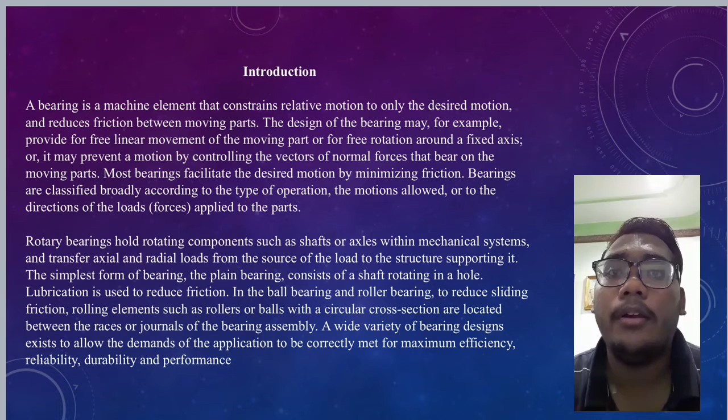Bearing is a machine element that constrains relative motion to only the desired motion and reduces friction between moving parts. The design of the bearing may, for example, provide for free linear movement of the moving part or free rotation around a fixed axis, or it may prevent motion by controlling the vector of normal forces that bear on the moving part.

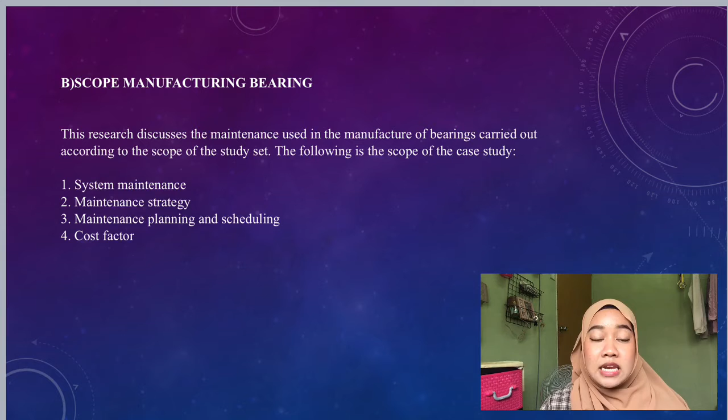Okay, I want to continue the presentation. Scope: manufacturing bearing. This research discusses the maintenance used in the manufacture of bearings, carried out according to the scope of the study set. The following is the scope of the case study. First, system maintenance. Two, maintenance strategy. Three, maintenance planning and scheduling. Four, cost factor. Now I want to present about the importance of choosing the right bearing component and material.

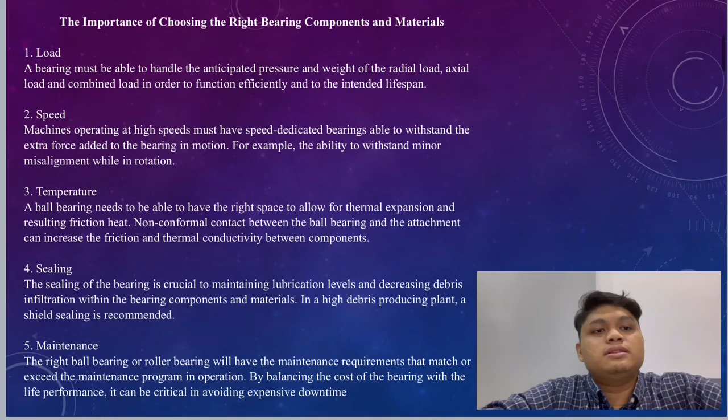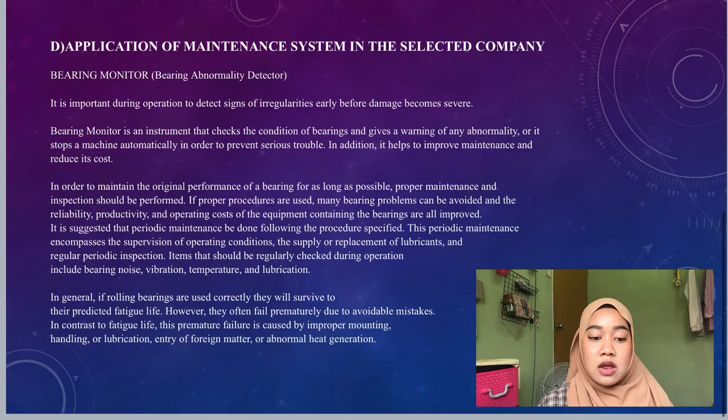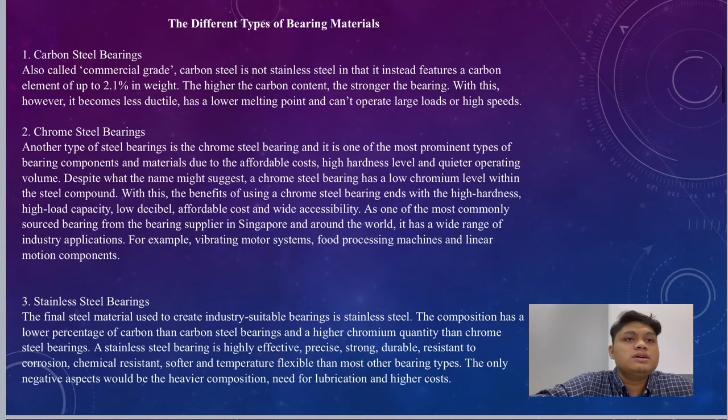Number three is stainless steel bearing. The final steel material used to create industry-suitable bearings is stainless steel. Number four is ceramic bearing. Ceramic bearings are manufactured to produce a highly non-corrosive and durable bearing with two rings of ceramic and a fluorine resin retainer. Number five is polymer plastic bearing, which is a porous material.

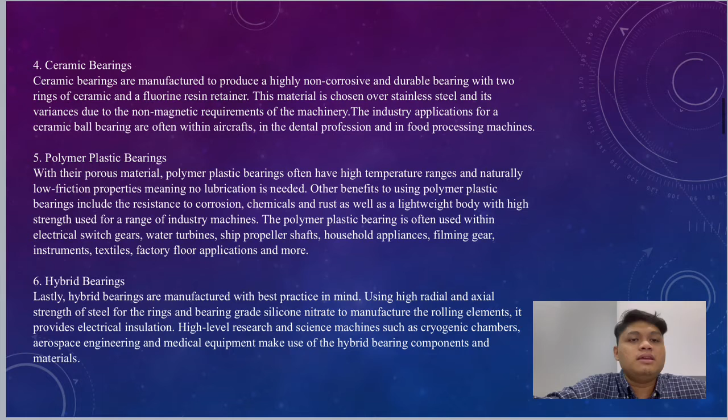Polymer plastic bearings often have a high temperature range and naturally low friction properties, meaning no lubricant is needed. Number six is hybrid bearing. Lastly, hybrid bearing is manufactured with the best practice in mind. Now I want to share about six common types of bearing.

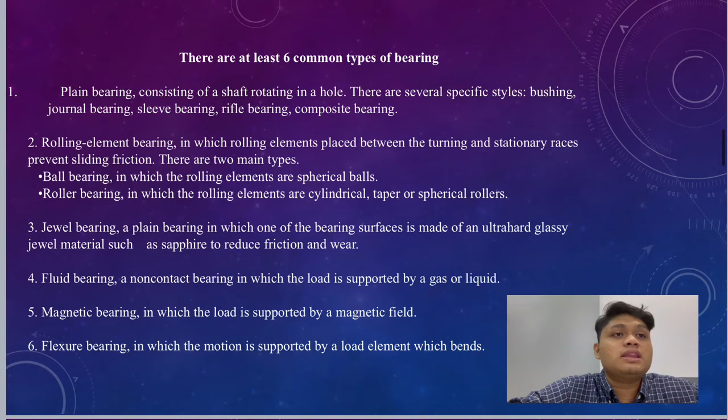Number one is plain bearing, consisting of a shaft rotating in a hole. There are several specific styles: bushing, journal bearing, sleeve bearing, rifle bearing, and composite bearing. Number two is rolling element bearing, in which rolling elements placed between the turning and stationary races prevent sliding friction. There are two main types. Number one is ball bearing, in which the rolling elements are spherical balls. Number two is roller bearing, in which the rolling elements are cylindrical, tapered, or spherical rollers.

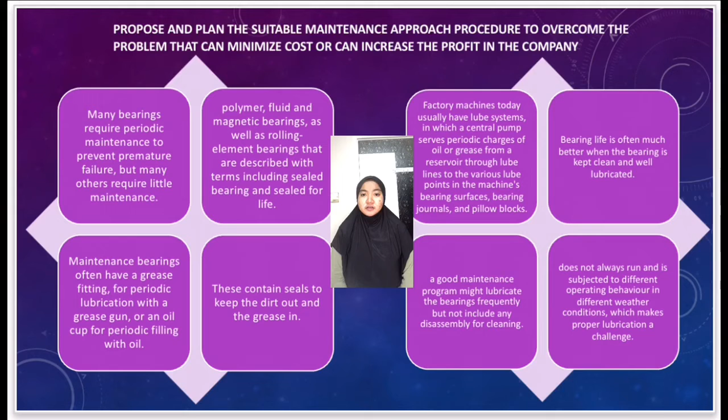Maintained bearings often have a grease fitting for periodic lubrication with a grease gun, or an oil cup for periodic filling with oil. Industry relied on many workers called oilers to lubricate machinery, frequently with oil cans. Factory machines today usually have a lube system in which a central pump serves periodic charges of oil or grease from a reservoir through lube lines to the various lube points in the machine's bearing surfaces, bearing journals, and pillow blocks.

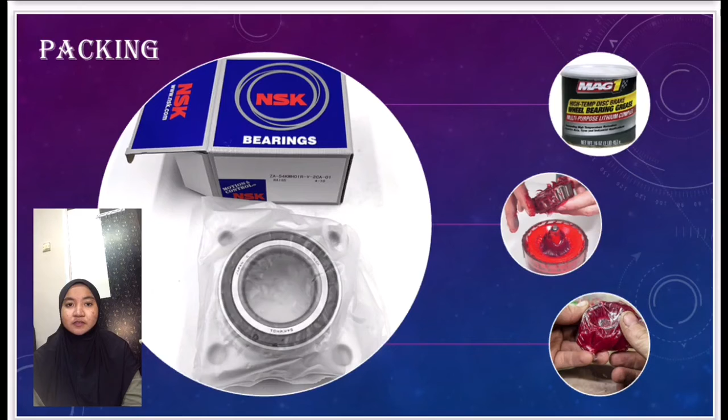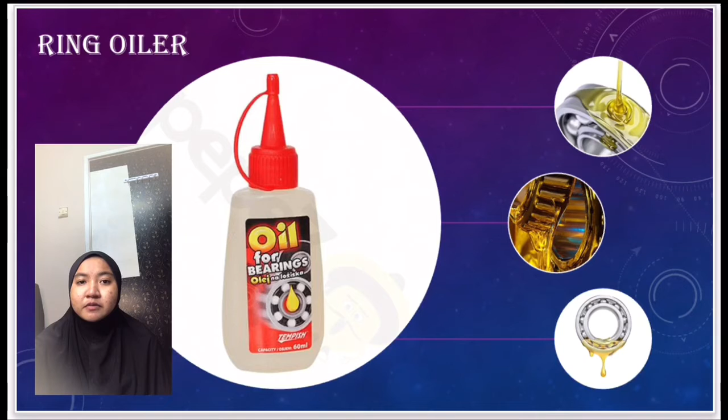One, packing. Some bearings use a thick grease for lubrication, which is pushed into the gaps between the bearing surfaces, also known as packing. The grease is held in place by a plastic, leather, or rubber gasket covering the bearing to keep the grease from escaping. Two, ring oiler. Bearings can be lubricated by metal rings that ride loosely on the central rotating shaft of the bearing. The rings hang down into a chamber containing lubricating oil. As the bearing rotates, viscous adhesion draws oil up the rings and onto the shaft where the oil migrates.

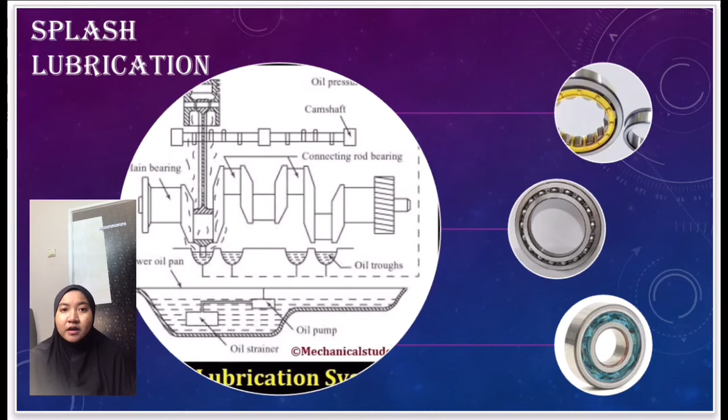Three is splash lubrication. A rudimentary form of lubrication is splash lubrication. Some machines contain a pool of lubricant in the bottom, with gears partially immersed in the liquid or crank rods that can swing down into the pool as the device operates. The spinning wheels fling oil into the air around them.

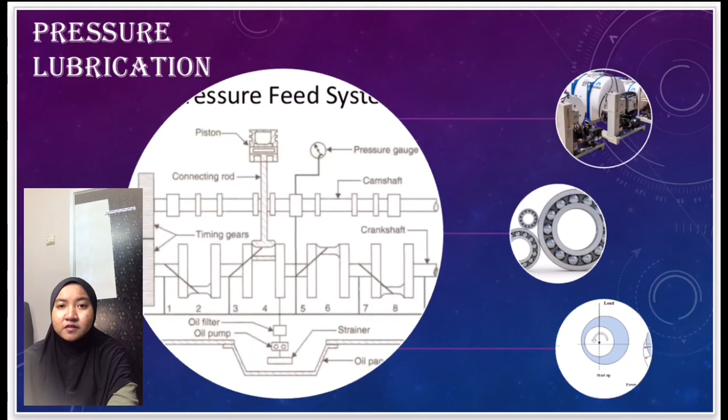Four is pressure lubrication. For high-speed and high-power machines, a loss of lubricant can result in rapid bearing heating and damage due to friction. Also, in dirty environments, the oil can become contaminated with dust or debris that increases friction. In this application, a fresh supply of lubricant can be continuously supplied, as in internal combustion engines, in parts of the engine where directly splashed oil cannot reach, such as up into the overhead valve assembly. High-speed turbochargers also typically require a pressurized oil system to cool the bearings and keep them from burning up due to the heat from the turbine.

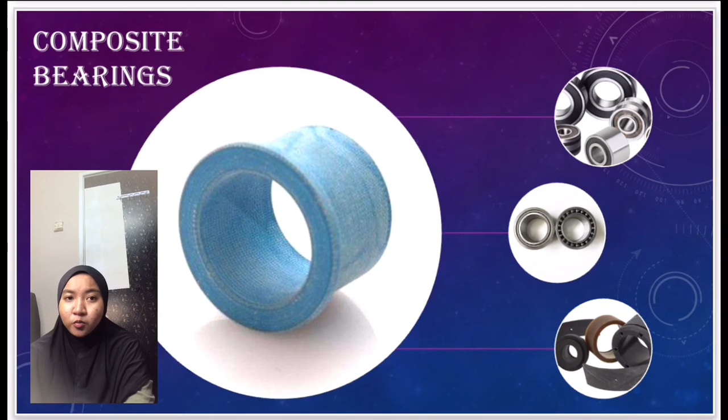Five, composite bearing. Composite bearings are designed with a self-lubricating PTFE liner with a laminated metal backing. The PTFE liner offers consistent, controlled friction as well as durability, with the metal backing ensuring the composite bearing is robust and capable of withstanding high loads and stress throughout its long life. Its design also makes it lightweight, one tenth the weight of a traditional rolling element bearing.

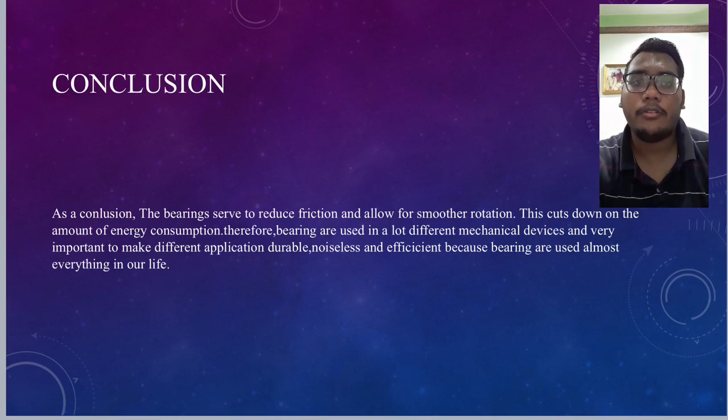As a conclusion, the bearing serves to reduce friction and allow for smoother rotation. This cuts down on the amount of energy consumption. Therefore, bearings are used in a lot of different mechanical devices and are very important to make different applications durable, noiseless, and efficient, because bearings are used in almost everything and almost everywhere in our life.

For references in this case study, we found much information in books and also on the internet. So we have much information briefly about this NSK company.